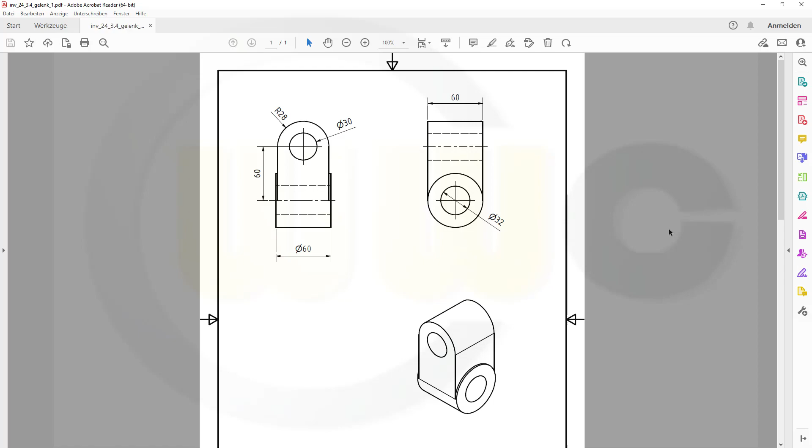Let's start with a sketch on the YZ plane. Let's use a positioned sketch, but it doesn't really matter, at least for the first one. I want to hide those yellow projected elements, and I need a rectangle, and I don't want to use those parallel constraints, so I will delete them.

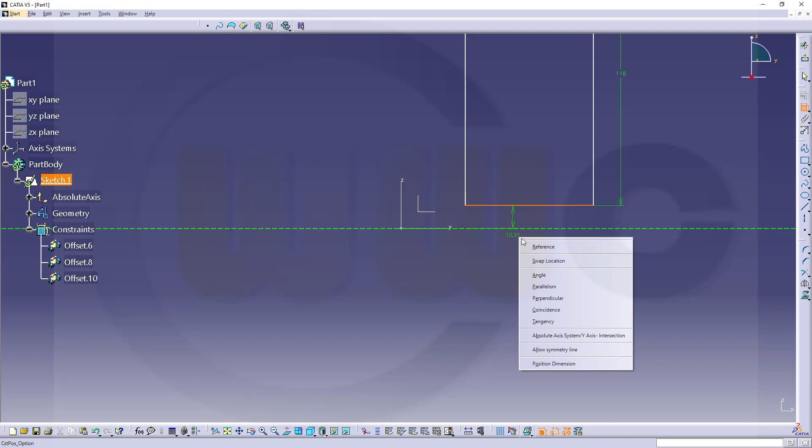Now, that rectangle should be 60 by 118. It should be aligned with the Y-axis here, coincident, and make it symmetric to the Z-axis. Leave that sketch. Make a block and extrude, make it symmetric, mirrored extend 30 millimeters and confirm.

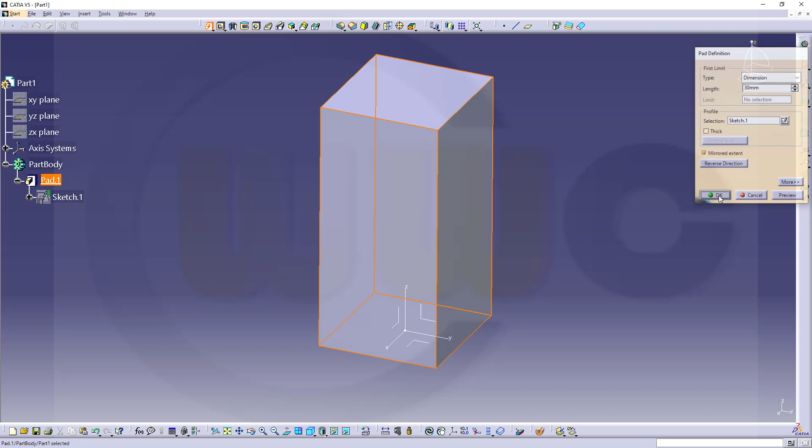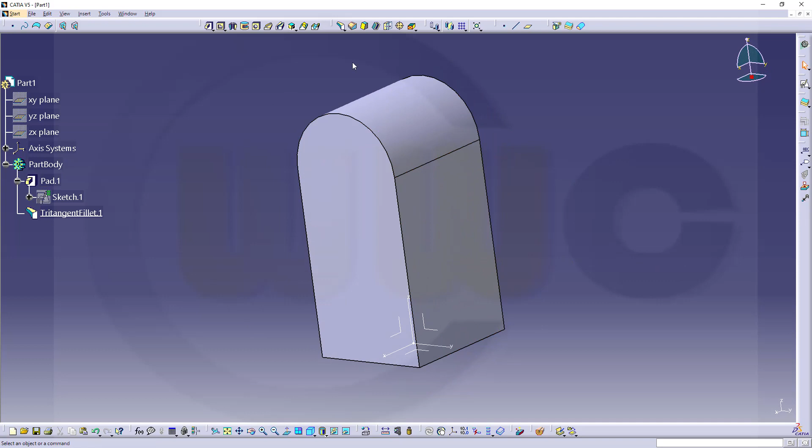Now I want to use a tritangent fillet. So that's the face to fillet. That's the other one, face to fillet, and that's the one to remove. Confirm. Same here, go for another one. This should be filleted, that one, and this one should be removed.

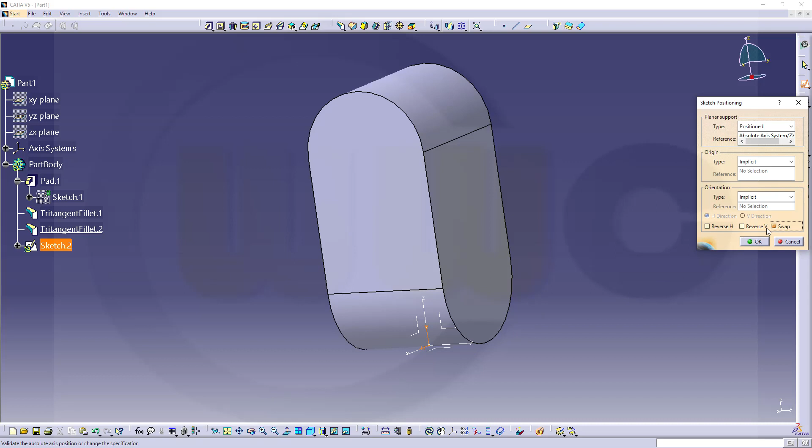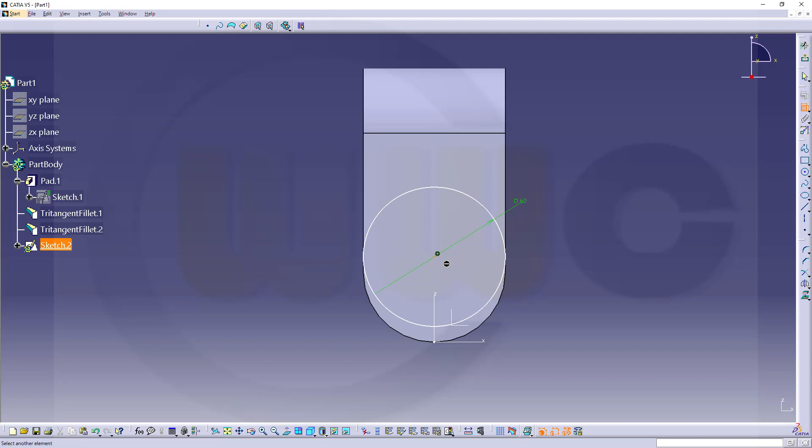Nice. Now next sketch should be on the ZX plane. Here I want to swap the axis, and yeah, that's okay. Again, I want to hide those. I need a circle. Diameter should be 60. That center point should be aligned with the Z-axis, coincident, and the distance here should be 30.

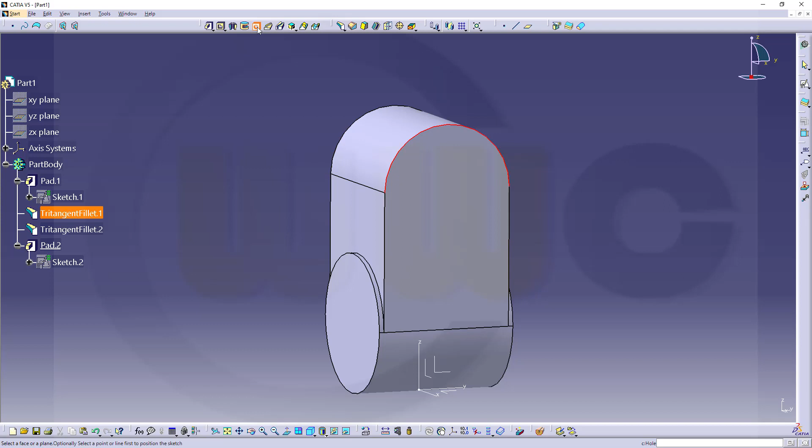Finish that sketch. Make another block, make it again mirrored extend, make it 30 millimeters and confirm. Now I need a hole, so select the edge, go for the hole, select the face, it's centered, and that sketch is already iso-constrained. It should be blind, yes, no, I want to go up to last. Diameter should be 30. And confirm.

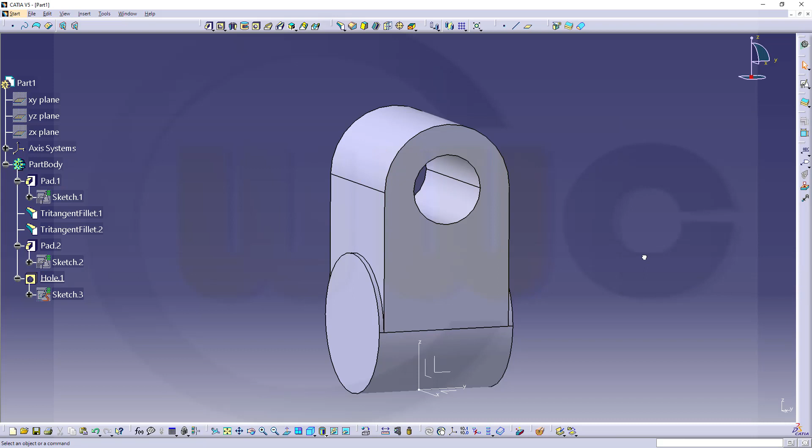Then select this edge here, go for the hole tool, select the face. It should go up to last and should be 32, and confirm, and I'm done. So I hope this was helpful.